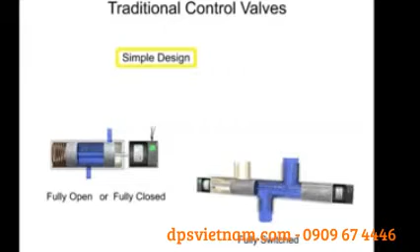Traditional control valves are of simple design and capability. Changing direction, flow, or pressure during machine operation would require a complex hydraulic circuit. Each desired direction, flow, or pressure would require an individual traditional valve to control it.

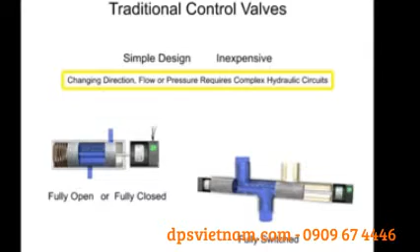Proportional control valves offer a solution to the complexity dilemma without introducing dozens of valves and hydraulic loops to the system. Physically, proportional valves appear similar to their on-off solenoid counterparts. The big difference is in the way their solenoid coils perform. Proportional coils operate on DC current and varying voltages that in turn produce a variable force to shift the spool.

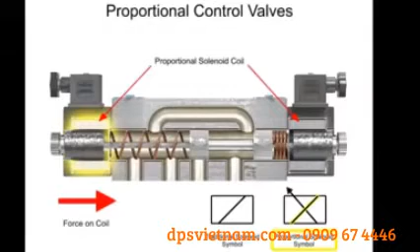The graphic symbol for this type of solenoid shows the solenoid slash in the operator box with a sloping arrow through the slash. With proportional valves, the spool can be shifted against the centering spring force to any distance up to full shift by varying voltage and current.

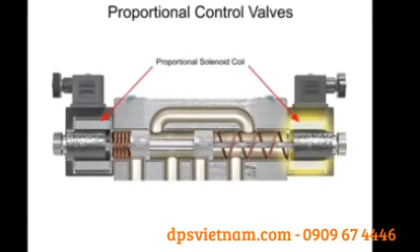As the internal valve spool changes position, new flow areas open up gradually and continue to open wider during full spool travel. To eliminate flow lag from spool overlap, most manufacturers cut V-notches that allow some flow to pass as soon as the spool moves.

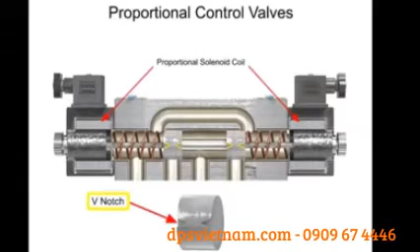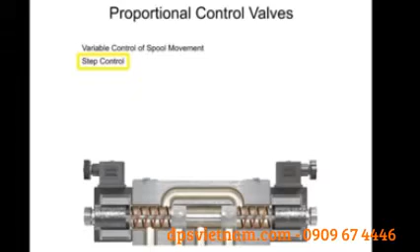Proportional control valves allow for variable control of spool movement, which allows more step control and metering of flow, speed, and direction. Most valves of this design are used in open-loop systems to smoothly accelerate and/or decelerate an actuator or cylinder. The proportional control valve allows for a simpler hydraulic circuit, but it is not accurate over a broad range of pressures, flows, and temperatures.

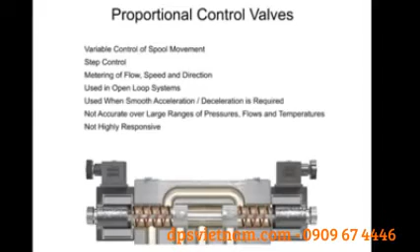Neither are they highly responsive. Proportional valves offer a variety of machine cycles which can safely be operated at greater speeds and result in improved machine cycle times and production rates.

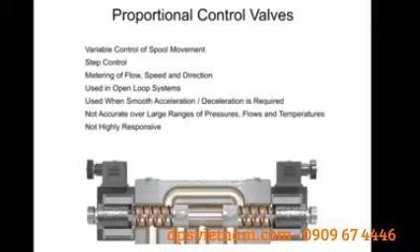The third type of hydraulic directional control technology is called the servo valve. First developed in the 1940s, servo valves operate with very high accuracy, repeatability, and high-frequency response. Servo valves are highly responsive and capable of handling minuscule flow changes both rapidly and accurately over a broad range of flow rates, but at an extra cost.

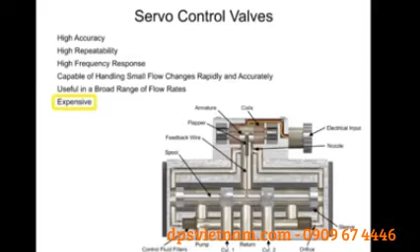The main difference between proportional and servo valve circuit design is that servo systems have a method of feedback that assures the actuator is doing what the controller tells it to do. Most industrial applications use feedback from electronic linear, rotary, or force transducers.

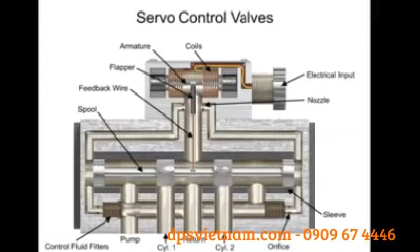A feedback wire attached to the flapper terminates in a ball end that sits in a very close-fit slot in the spool. When the torque motor coils receive a current signal, the armature rotates clockwise or counterclockwise and pushes the flapper closer to one nozzle and farther away from the opposite one.

This allows pressure to increase at one end of the spool and decrease at the other. The spool then starts to move away from the higher pressure. If the armature turns clockwise, pressure builds on the left end of the spool and it moves to the right.

With these very accurate feedback devices and a fast response servo valve, an actuator's position, speed, and/or force can be repeatedly established within an extremely close range. Electronics provides the accuracy while hydraulics provides the force via a super-responsive servo valve.

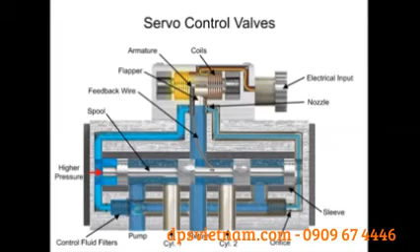Proper evaluation of the requirements for a particular application can assist a technician with evaluating the performance of a valve and its suitability for the task at hand.